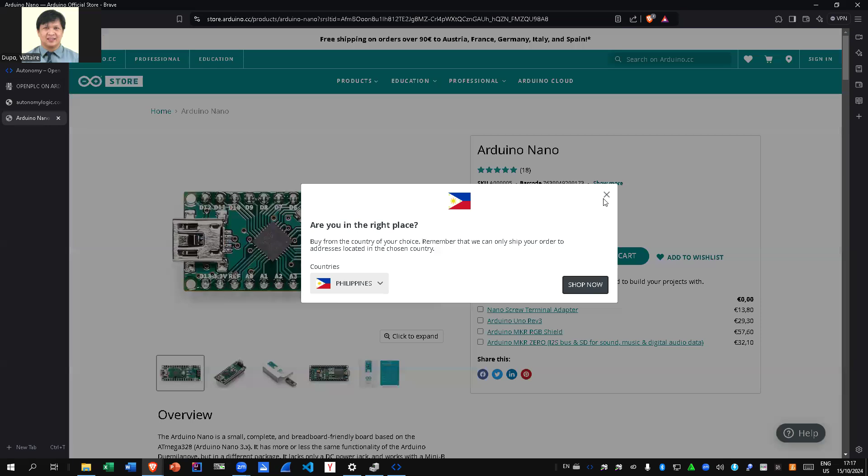So this is an Arduino Nano. It costs 26.8 euros. Hell of a lot of money, in the Philippine standard. But again, you can buy it cheaply here in the Philippines because we're close to the manufacturing base, which is China and Taiwan. Even the Philippines does manufacture some chips. SGS-Thomson does, and ST Micro does. So when we go back to this one, headers and terminal blocks.

This is now the perfect means for me to do programming or to introduce programming to students, when I use this one, which is the one in front of me now. So I have inserted in it a Taiwanese manufactured Arduino Nano and a similar terminal breakout board wherein you can just basically wire in or screw in wires that go to specific locations. Now, the suggestion is for students to have something equivalent to this one.

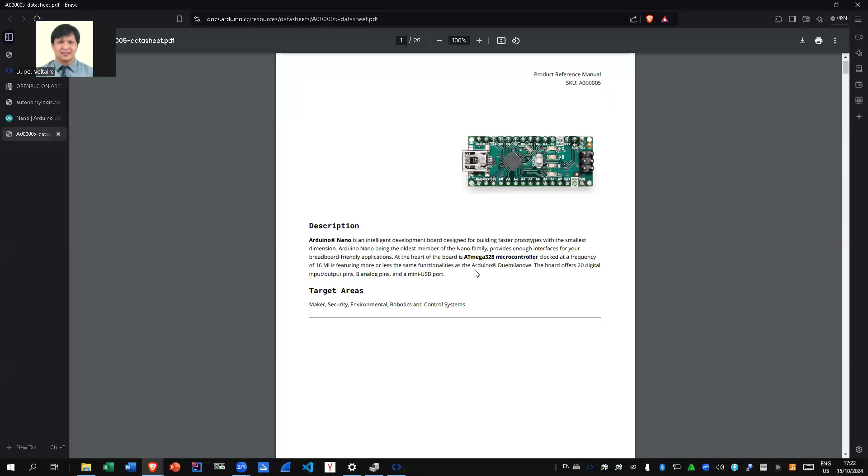So, let's take a look at Arduino Nano pin assignments, just to put some context on why they selected that sort of thing. So, datasheet. Okay, we have Chinese written inside. This is a better one. So let's expand this one and we can see further why the selection is done that way.

You can see here PD values listed. These belong to a specific register, so they're all belonging to the same register. So we're not using D0 and D1 because these are exclusively used for communicating to the device. Remember, in PLCs, we communicate using Modbus. So this is for Modbus. So it makes more sense now why the inputs are just limited to D6. We're not using D7 because traditionally the last bit of the element is actually used to indicate a sign.

Okay? Whether it's a negative sign or positive sign here. Okay? Now, the odd part is this one. We started off with 8 and then we proceeded to 11, 12, and 13. So we're basically just using PB0, PB3, PB4, and PB5 for this particular output consideration. But again, since they're all Bs, this is basically word around the register B. And this is around the register D.

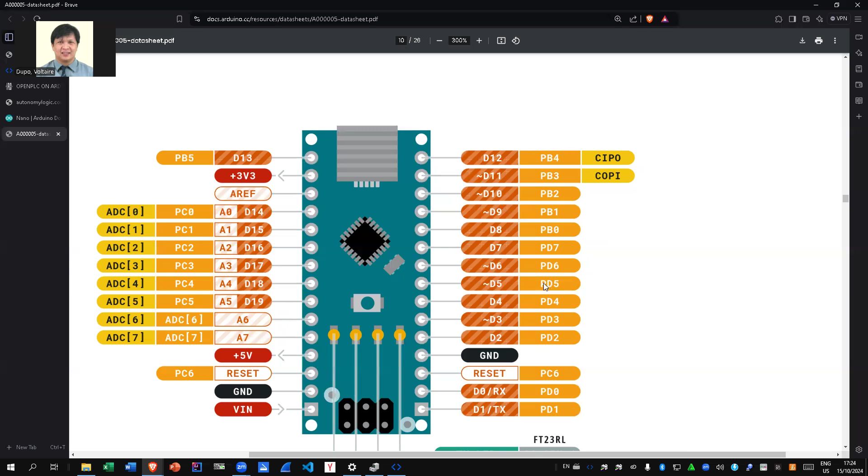Okay. So that places the I/O configuration in terms of something we can better understand from the computing science aspect. When we're looking at analog input data, we're using a word to store the information. So the word in this case is how long? Let's go to documentation. Hopefully it works. Some time ago I tried it, didn't work.

But from what I can remember, this is a 32-bit word. So meaning to say, your number can go up to 2 raised to the 31. Kasi again, you have the negative aspect to it. So it doesn't work that way dun sa kabilang side. So these are 32-bit words. Let's do a calculation. 2 raised to the 31st is 2 million. No, sorry. 2.1 billion yung size na kaya niyang store. So this is basically the length of the registers that we have here.

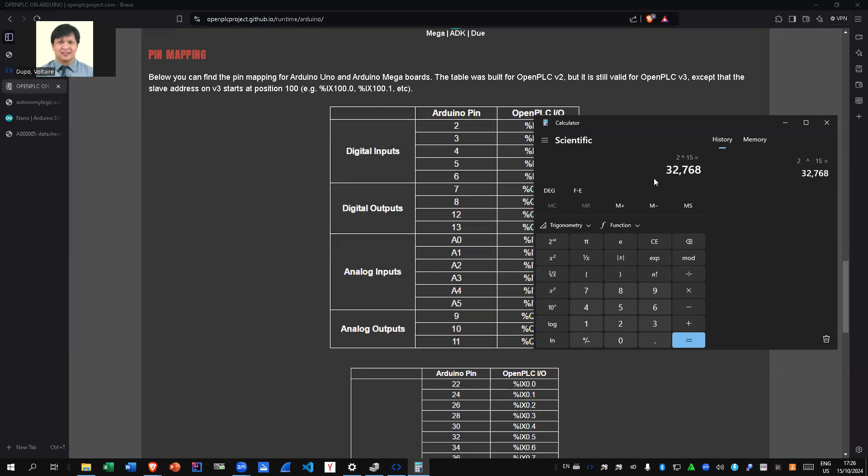Now, if we're looking at 16-bit words rather than 32-bit words or 16-bit words, we can look at, again, calc. Pinatay ko agad. 2 raised to the 15, 32,000. Not too unreasonable a number. Okay pa rin yan for our purpose. So take note, I'm not using 16 because there's a sign bit, yung last digit natin. Okay. So let's go back.

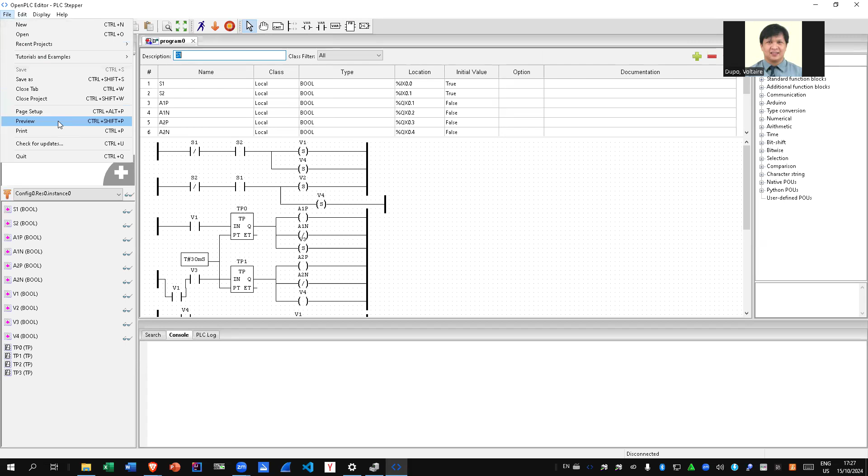So when we're doing assignments here, let's open a project. I created a project earlier called PLC Stepper. Select folder, program 0. Meron na ito. So this is for a different stepper motor. Close project. New. I'll create a new folder. I'll call the folder PLC test step M413B. And then I'll select this folder. So write down the name, stepper M413B.

Select the language. In this case, we're using ladder. This is function block diagrams, and this is script. So we use only LD. Let's go back to this one. To add a variable, you now need to consider what you want to use. You need to understand and remember what IOs there are. So in this case, I'll say

D13, type Boolean. Boolean is used for input pins and output pins. The location again is %QX because it's a Boolean value, 0 which is the output 0, and the bit number 3 natin. So this is pin 13, which I am designating as the clock. When I place in plus here, it does a magic thing. Nag-a-add na lang siya. But I don't need an addition, I need a subtraction. So yan siya because this one is now designated 12 for direction. So, ganyan yung system.

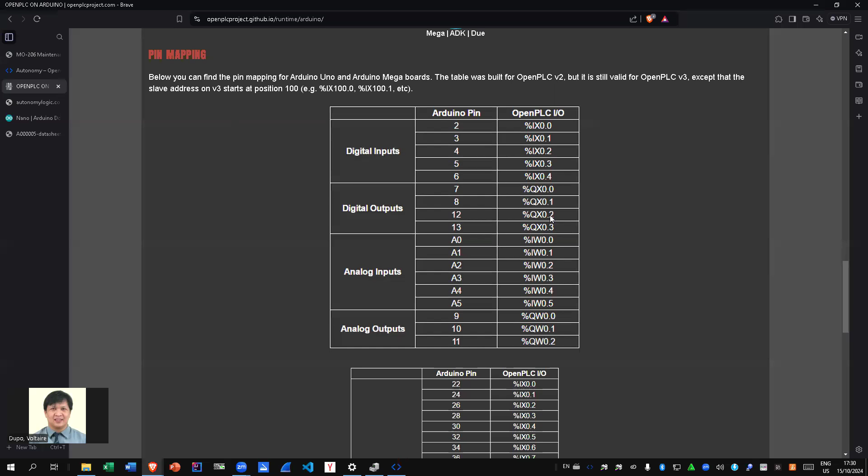When I place another one, I make this into number 11? Sorry. This is the reason why it's turned on. So I can always go back. The 8. So I change this to 1, and I change this to pin number 8, which I use for enable.

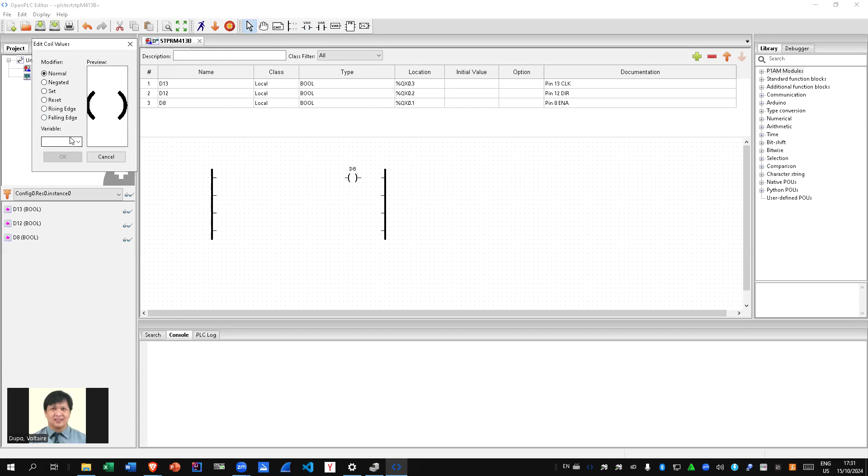So let's do a program. In this case, I need a left power rail with 4 connections. I need a right power rail with 4 connections as well. I don't need any inputs here because this is a freewheeling experiment, so no input pins necessary to control the function. Let's place in the variables first. This is for 8, which is enable. It's normal. Let's write in for pin 12. Normal din siya.

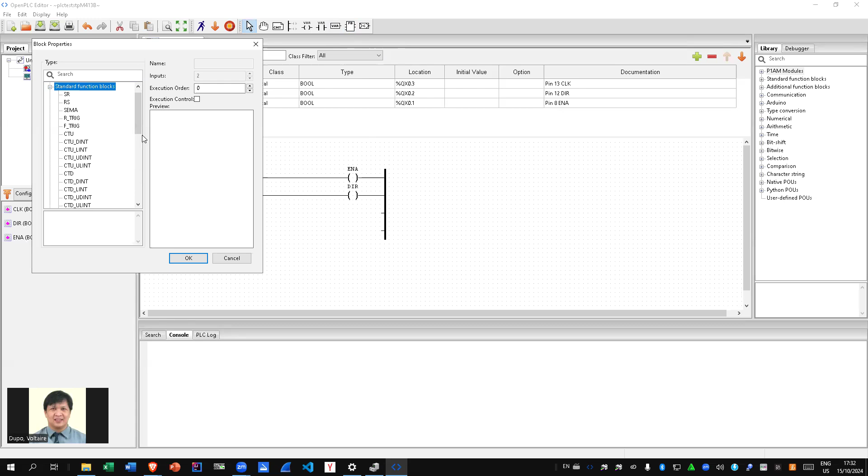So notice I did a sequence wherein I did these first two items first, yung enable, which is 8, and direction. My clock, on the other hand, I'm not yet putting into play because I need a counter to do the action. A counter can be taken from the functional block. We have a standard function block here. Always use this one if you want to migrate your ladder diagram program into industrial PLCs.

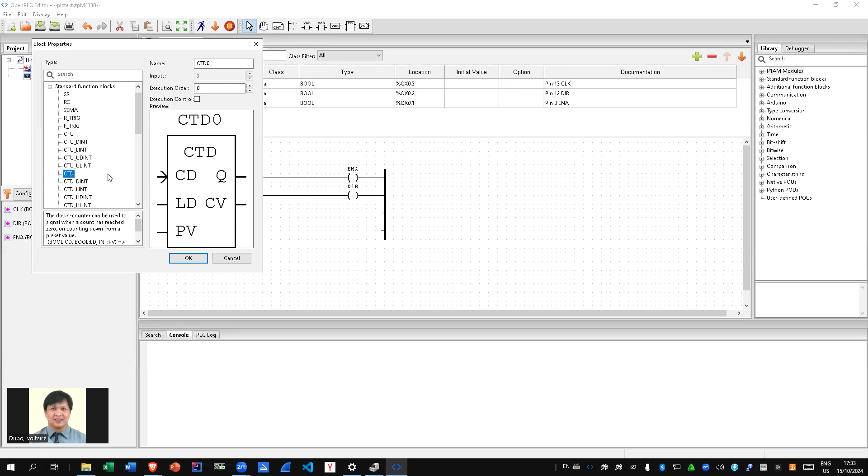So we have the reset flip-flops, a semaphore, which is basically a container for digital memory. We also have the count up, with the count up signal, a reset signal, and a preset value, which is the count at which Q changes, Q becomes high. Tapos we have the current value for the count. We have the countdown, the count up, both up and down, reset and load the values. And then we have this one, which is the timer pulse. It says here it's supposed to give out pulses. Again, sometimes the wording they use here is not that good.

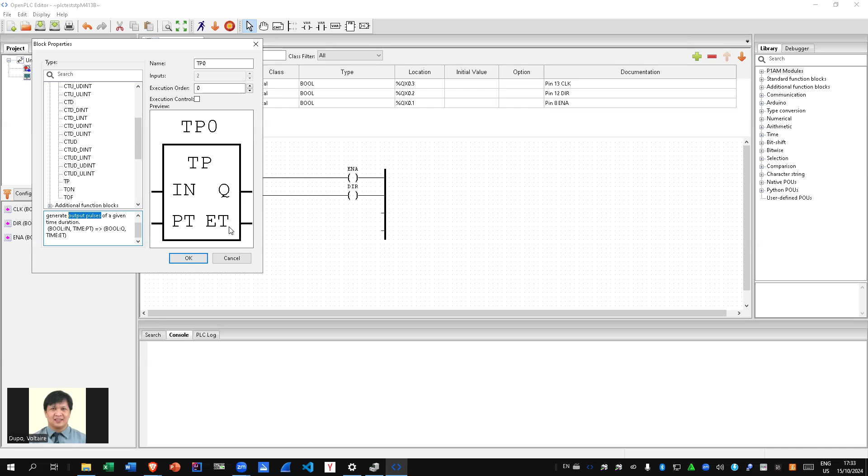Kasi hindi siya, it's not reflective of what really does happen. Okay. But we'll use this one. So, in this case, I'll place in an in value here. I'll raise this up a few times, and then we'll lock in the value for our clock, which is the 13th pin. So, as you can see, I renamed the pins, so it would be a lot easier to look at.

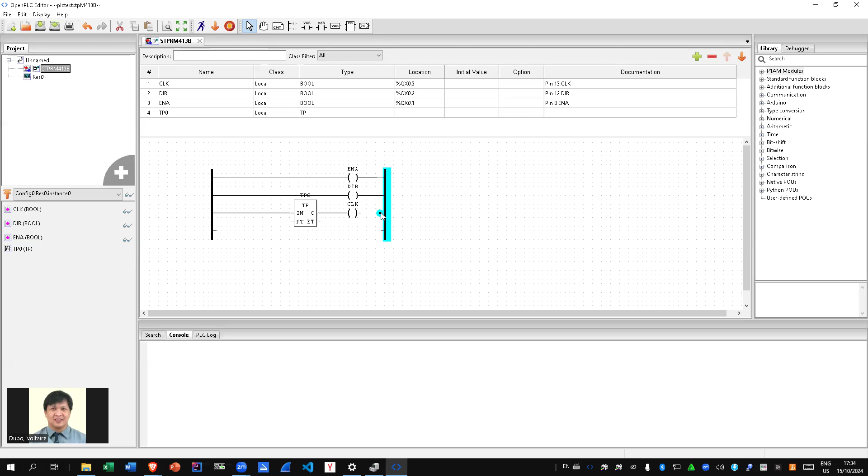So, next, we need a variable. The variable that we can place into consideration is now based on time. So, if it's time, we always place in T sharp or T hash. And then we place in the value. So, for this one, we'll use a smaller value na 20 milliseconds. So, this 20 milliseconds is attached towards our PT value here.

So here, you can see there's a shade here. The shade is actually an icon for lookup. So the lookup value for clock, the lookup value for dir, the lookup value for ENA, and the lookup value for Q natin. So in this case, if I double click the clock, I should be able to, yun, okay. So you saw an error.

I think this is the only issue I have with OpenPLC. But again, because it's free, it allows you to do something with lesser amount of resources. It's something forgivable na. So let's try to run the simulation. Change the range to 10 milliseconds and then stop and do a program run once. Nakita nyo, false pa siya sa unahan. As time passes by, well, stop natin. Tapos run ulit natin.

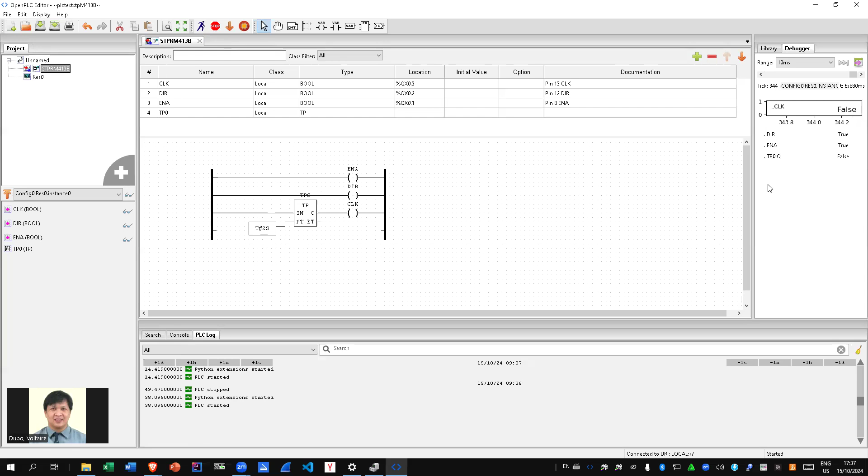So, did you notice anything? It doesn't move at all. Okay, yun yung problem niya. So, if this is the issue at hand, that it doesn't quite move, we have an issue with regards to the signal pulse. I'll show you kung bakit. Let's move it to a smaller value. 2. Let's run the program. So 2, tapos nag-fall siya and then stays false all the way. So it doesn't change anymore. So yun yung pinaka problema dyan.

So let's save this one. So for this one, we therefore need something else entirely different. So let's turn this back to 20 ms. And let's rinse and repeat. So I'm now going to take out the clock from this rung. I'm going to move it to the bottom rung, dito sa kabila, sa TP1 natin. And now I have to insert something. Kasi seemingly the problem is the TP0 is not being reset. So it doesn't generate clock pulses. It actually generates a changing rising value or falling value of a

clock pulse. So in order to trigger this one, pabalik dun sa kailangan natin, we need to do some revisions. So I placed in here clock. I am now placing in another variable. So this variable I'm including here is no longer a clock. This is just a reset point. So I'm removing this one kasi it's not a valid output to reset TP0. So lalagay ko lang siya dito.

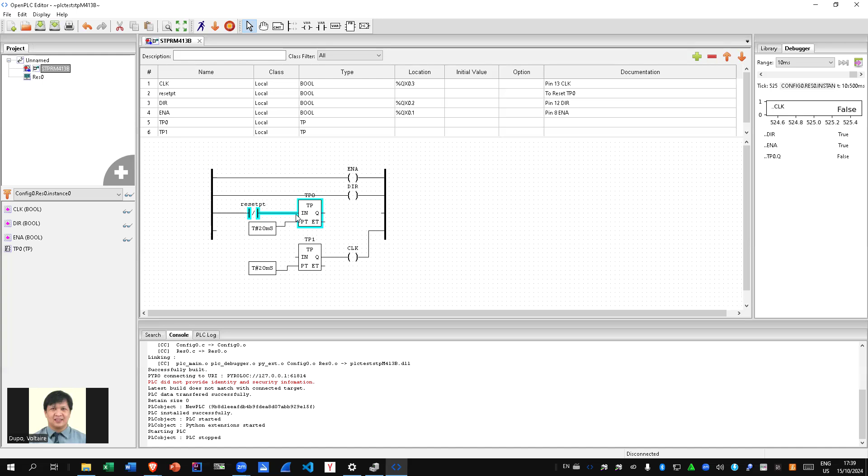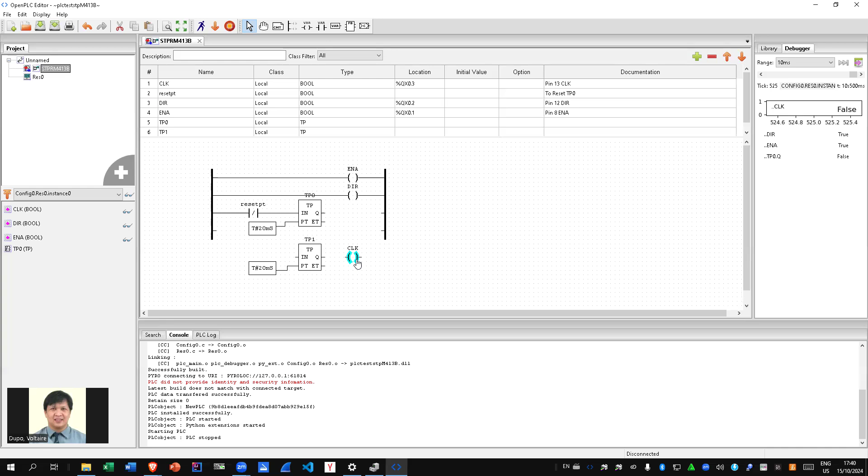Again, this is the biggest difference of why a ladder diagram is different from a lot of different things when it comes to programming. Because you can actually see here that the output can actually also become an input. This is not something that you see normally in a program, but it can be done that way. So, ganyan siya. So, reset PT. Tapos, we can include here some values ng clock natin. Maybe it's premature to move the clock. Balik ko lang ulit siya.

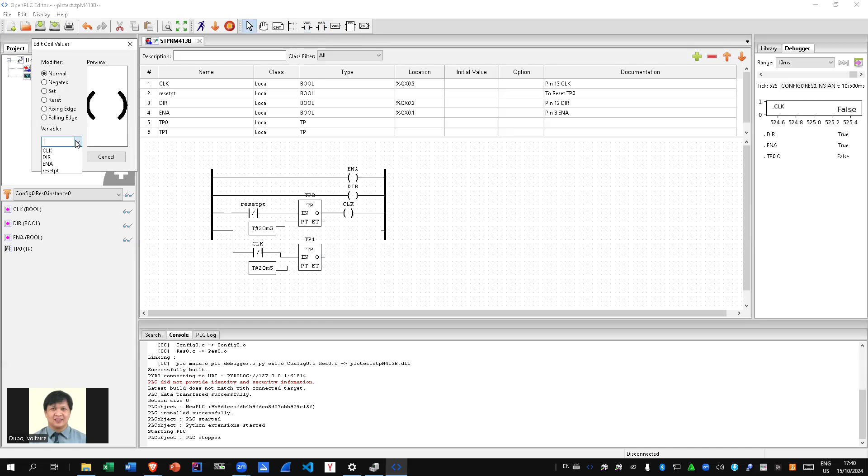And on the other side, we place in the clock as a normal value, for an input trigger pulse. Maybe I should put it to negated. Tapos, I can place here my reset pin as normal and sequence it towards the last portion. Diba? So let's run it. As you can see, the clock is now handling it correctly. Okay, stop. So we're getting the clock pulse occurring in the output natin.

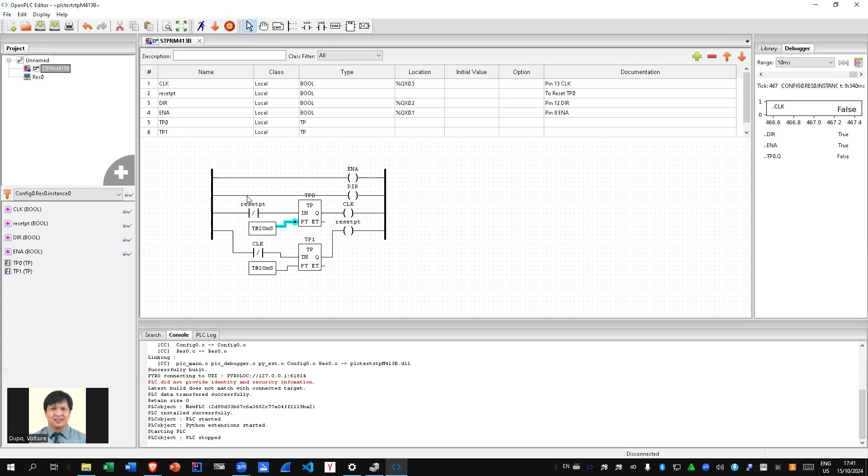So next, let's do a save. And let's generate the program. So I have here an Arduino Nano. This is an R3 model. It's connected to COM22. I'm transferring the program to it. So it generates the binary file, which is basically the hex file. That's a compile process. If you have antivirus software, the antivirus software will try to intervene here. So now I'm able to see the action for my output on my Arduino Nano. So ganyan lang siya.

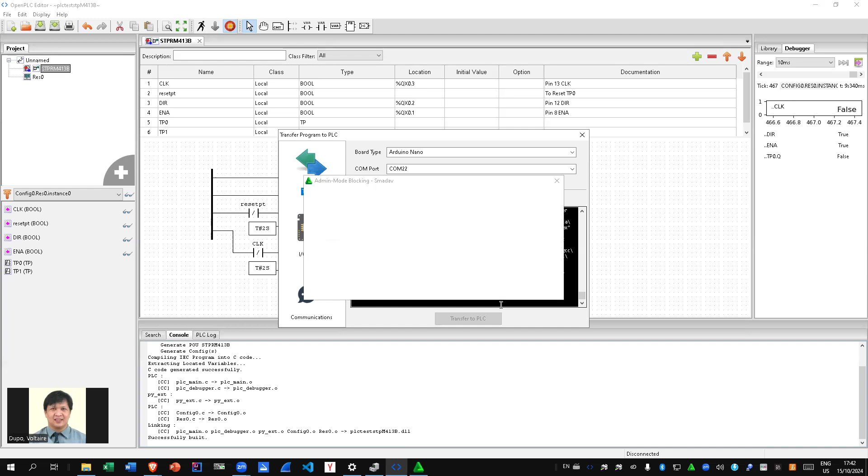So if I want a smaller value here, let's say 2 seconds on and 2 seconds off to reflect on my Nano, I can just change the values here and then redo the software code. Okay, keep running. Serial discovery kasi yung ginagamit niya in order to push that one out.

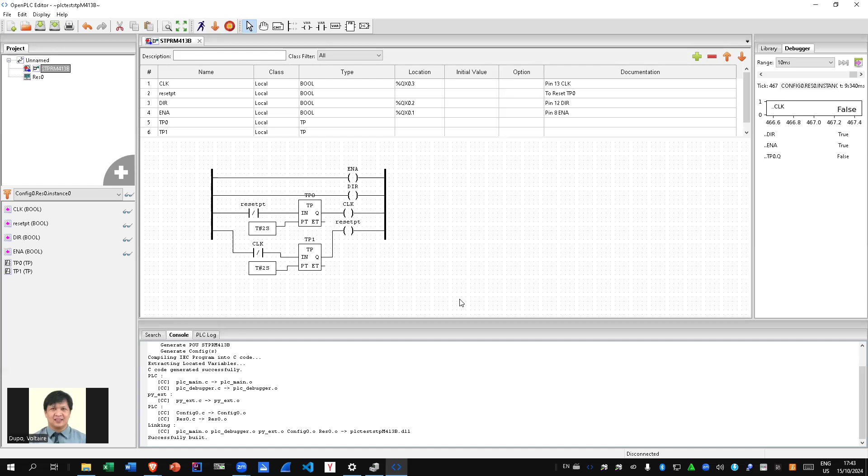So that's it. So this is how you utilize OpenPLC and load data into another device. So in this case, I'm using an Arduino Nano. So the metrics do change if you're using an ESP32. So that's about it. We're done with this one.